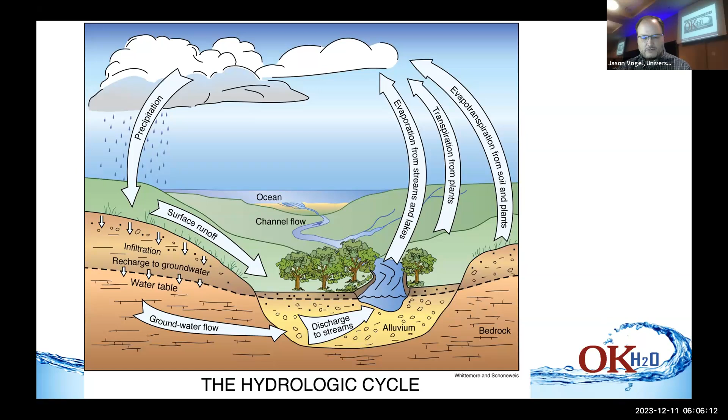And you can even see that, downstream, it appears that the stream is somewhat incised. So there's a lot of things on this particular hydrologic cycle image that really play into this nexus of stormwater and floodplain management and in-stream management.

I think most on here have probably seen this image, discussions of land use impacts on the water cycle, depending on the percent impervious surface. These are some EPA images. In this particular instance, you can get 5 or 6 times more runoff when you get lots more impervious surface. That isn't news to a lot of folks here.

Specifically, I was talking in Oklahoma, and we have a book called the Water Atlas of Oklahoma that talks about averages for each part of the water cycle. A lot of people think about Oklahoma as just straight prairie, but Oklahoma is really diverse. It has 13 different ecoregions, going from the Panhandle, where there's 15 inches of rain, to southeast Oklahoma, where there's 65 inches of rain average per year. There's actually native alligators in southeast Oklahoma, and that's all in the foothills of the Ozarks.

The natural system down in southeast Oklahoma may be 1/3 runoff, lots of rock, foothills of the Ozarks, lots of rainfall. Central Oklahoma, where Oklahoma County and Oklahoma City are, is about 15% runoff, a lot of evapotranspiration. And then you get out to the Panhandle, not as much rainfall, and it's relatively sandy. It'll go into the shallow subsurface, but then 97% of that water actually evapotranspires, and there's only 2% runoff.

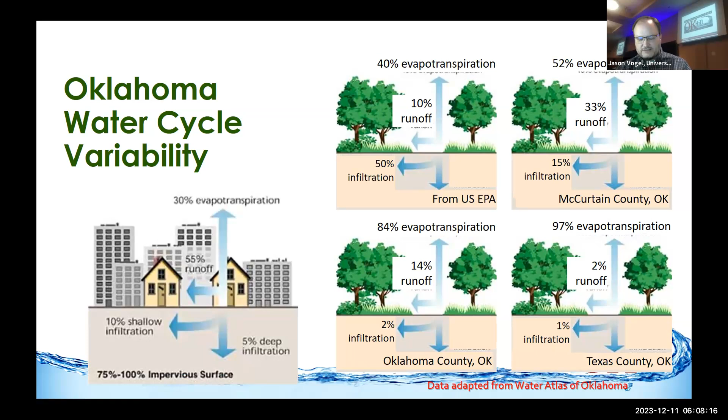So impervious surfaces in an area where there's naturally only a 2% runoff, and you change it up to 60% runoff, man, that's going to make a huge impact on our water quality, on our streams, compared to what is there. So I wanted to start having that conversation and have them think about, from east to west, the different things that we're dealing with, and how that's so important.

As I mentioned, this was floodplain managers. Some of them wear more than one hat and they know what stormwater management is. Some of them are emergency managers or in other areas. So for background, I started talking about traditional stormwater management with pipes, channels, ponds, things that move the water off as quickly as possible.

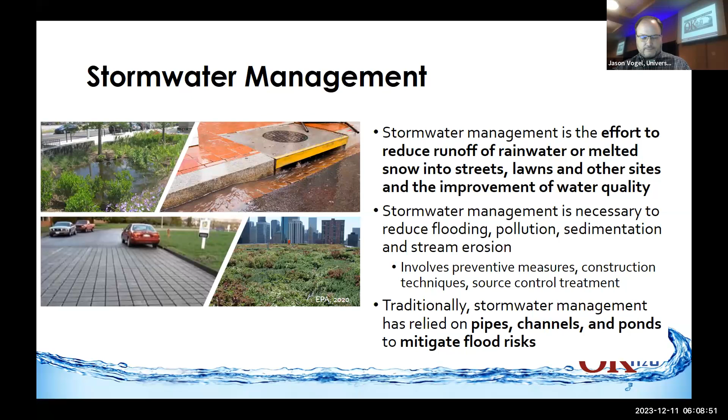In this group, we know that that's causing degradation of the stream and the floodplain downstream potentially, and to the habitat. And I talked to them about how a detention pond works, where we're trying to get the pre-development peak flow rate equal to the post-development peak flow rate.

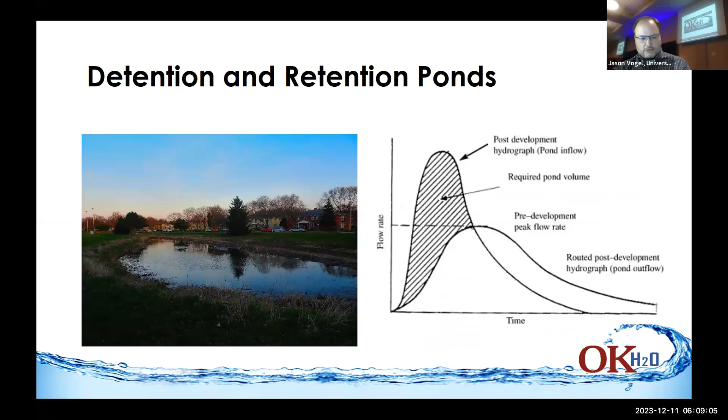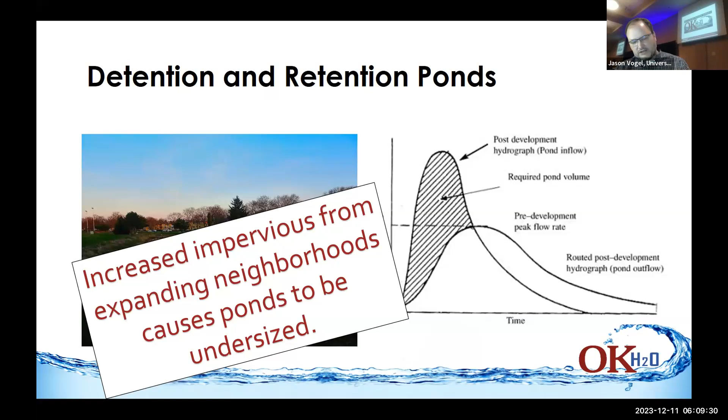And a lot of places in Oklahoma, the ponds may be sized for a particular development, but then another development comes in 5 years later upstream, and that pond is now undersized for that entire area, especially in some of the smaller communities where there's less thought about connection and integration of the management. And there's also a water quality component to detention ponds.

The folks in this room are thinking about detention ponds solely from a floodplain management and a flood management standpoint. So just kind of bringing some of those numbers in there from our nutrients, sediment, heavy metals, some of the things that are causing a lot of impaired streams in Oklahoma.

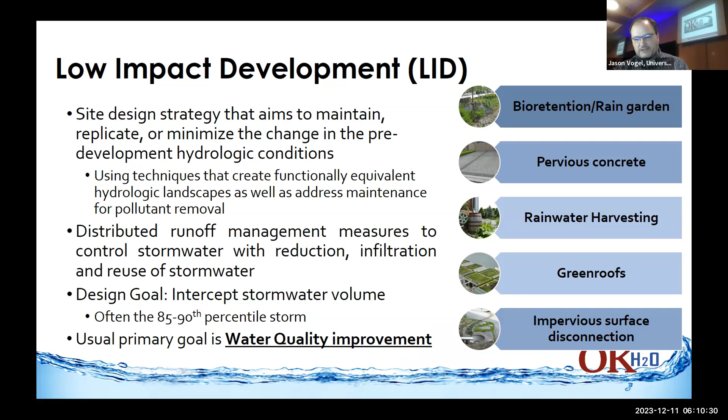Next, we move into low impact development, sometimes called green stormwater infrastructure, or a lot of different types of things, with the primary goal of water quality improvement. Usually when you design these, you're trying to intercept something that's often called the stormwater volume, at least in Oklahoma and a lot of the areas around here. That's often between the 85th and 90th percentile storm, intercepting the first inch. That's not going to do a lot for your flood.

And I just went through a little exercise utilizing the rational method. If you put some kind of LID structure like bioretention in the corner of an impervious area, depending on how big that bioretention cell is, if it's 5% of the area, it's that orange area. If it's 10%, it's the yellow, and hopefully y'all can see those colors. If it's 15%, it's the purple. But depending on what the infiltration rate of the soil is, you're really only reducing the peak by less than 10% with traditional bioretention design.

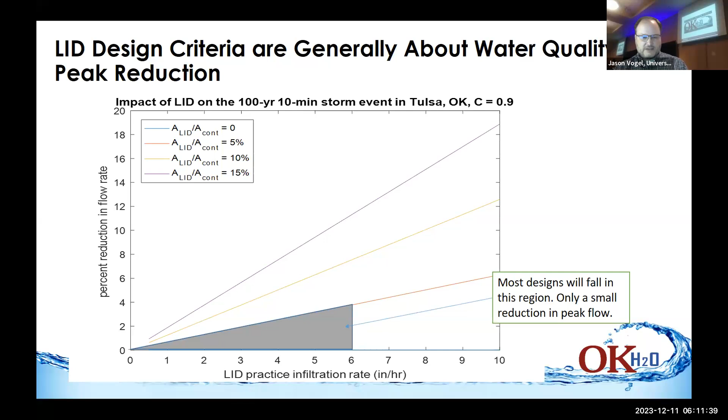And that's a question that I get a lot from folks that are in the flood area and really in Oklahoma, because flooding is a much more in the news and on the mind issue than water quality. And so when you're talking to them about spending money on stormwater management, such as green infrastructure, they ask about the flood reduction. And, as traditionally designed, you can't do that.

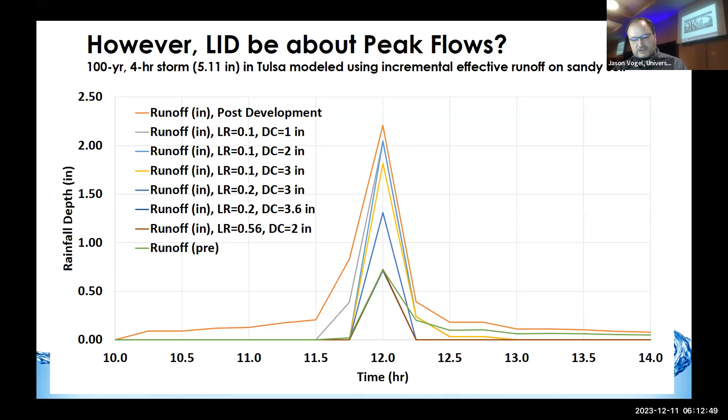Those last two with a loading ratio of 20%, and designing for 3.6 inches, or a loading ratio of 0.56, which isn't necessarily realistic because it's greater than half of the area. You can do it with 2 inches, but there we're able to reduce the flow. And we actually have an over $4 million installation that I helped design going in Oklahoma City that is doing just that.

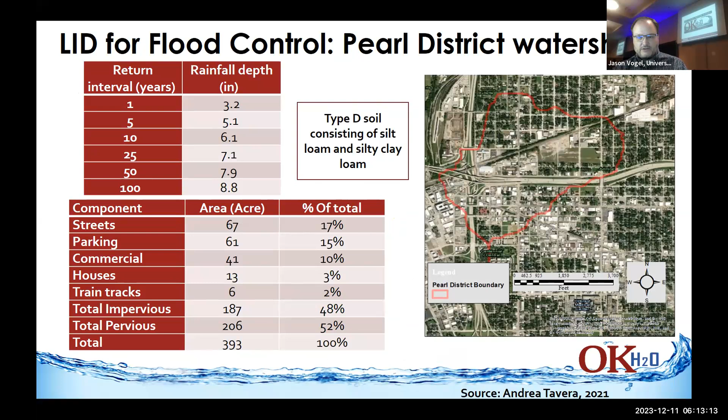No, I won't talk about that specific one, but here's a similar exercise that we did in Tulsa in the Pearl District. One of my former master students, Andrea Tavera, did this looking at the Pearl District. It's an area in Tulsa that floods a lot. It's just to the east of downtown, older part of the city, where we used a model called InfoDrainage.

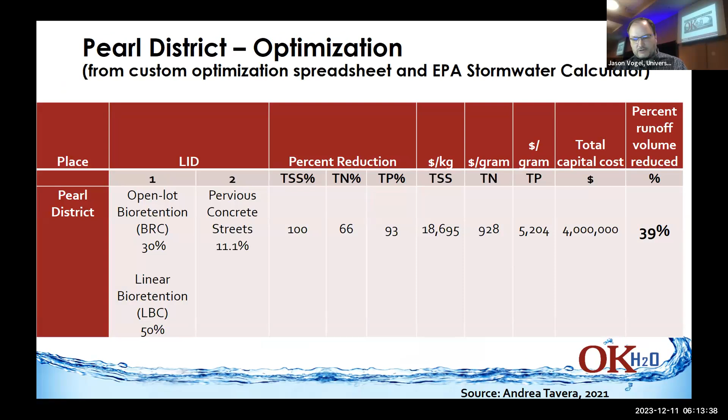We modeled the troubled areas, did some optimization, trying to design for water quality, but also that hits on water quantity. So we're reducing the flow with bioretention and pervious concrete in that area, looking at 3 different areas. And with green infrastructure, we can reduce that flood flow around 75% at the 3 areas, and reduce that 100-year storm to less than the 1-year storm

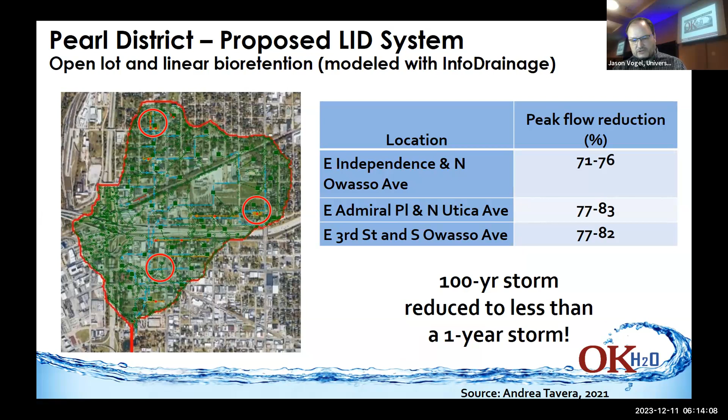for those drainage areas. And that's something that's pretty attractive in these areas where it's all built out, older neighborhoods, and buying out areas to build detention ponds is not necessarily politically popular. And so if they can do some other things, that's really great. At the same time, we're really helping the water quality with sediment, nitrogen, and phosphorus reduction in those areas.

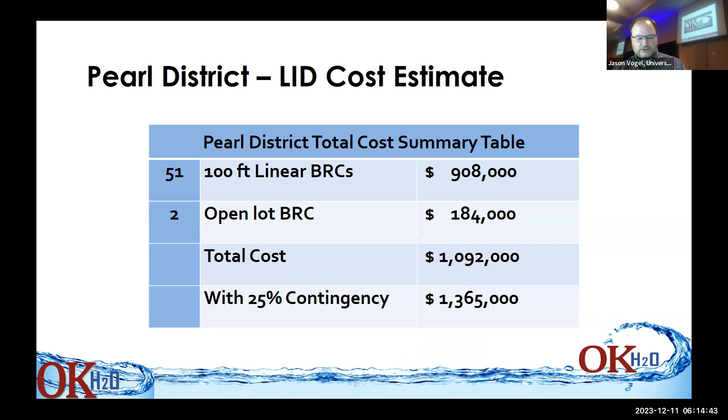And here's the cost estimates for what we had proposed, about 1.4 million. The cost of buying out lots and building ponds is greater than this. This obviously is just the capital cost, not the maintenance cost, but still it's a pretty cost-effective solution, and something that even in Tulsa we're continuing to have conversations with them about.

So that's the upstream part of the drainage. And then moving into the floodplain, once again, the audience that I was talking to for this presentation was floodplain managers.

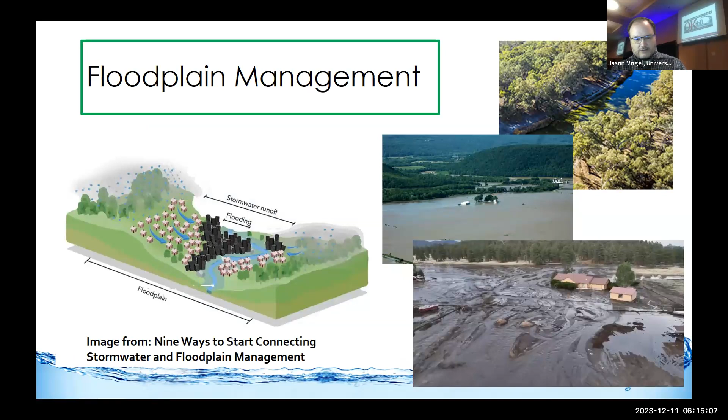There's this really nice document out there, if y'all haven't seen it before, 9 Ways to Start Connecting Stormwater and Floodplain Management, that has some pretty similar type of topics. But at the National Stream Restoration Conference, David connected me with Will Wilhelm, and I borrowed a couple of his slides because I thought it was so pertinent. I don't know if anybody got a chance to see his presentation,

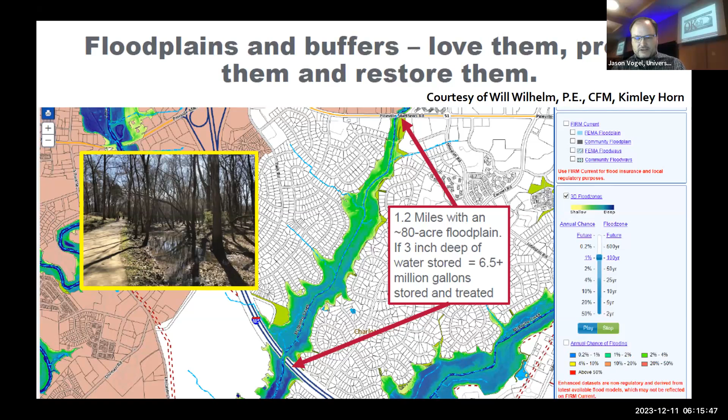but he was talking about an area that he was looking at, 1.2 miles of stream with an 80-acre floodplain. And if the floodplain, and this is just an assumption, I talked to him about it afterwards a little bit, if the floodplain stored 3 inches of water, that's 6.5 million gallons stored and treated. And if you're trying to compare that to bioretention basins designed with traditional design criteria, that's 500 to 700 bioretention cells that connected floodplain is performing the same function. And so you can—

It is not. Pardon? Question? Oh, did somebody say something? Okay. I think we just had somebody off mute, so just continue.

Okay. Cool. So that is something that's not been specifically studied. It was just some thought process from Will, and I thought it was really interesting. As a researcher, it's something that's stuck in my head, and something that I'd love to explore a little bit to see how that comparison plays out.

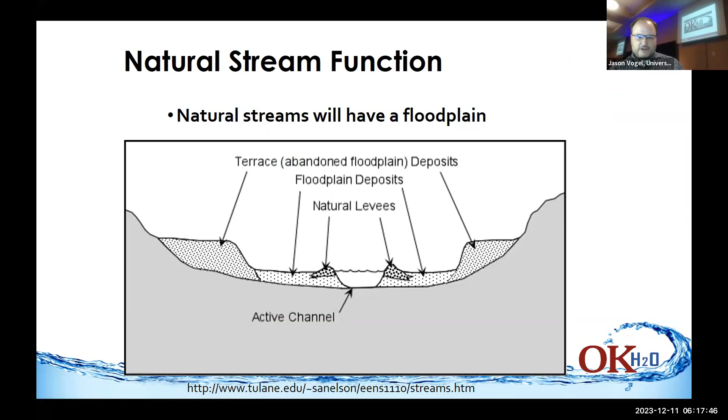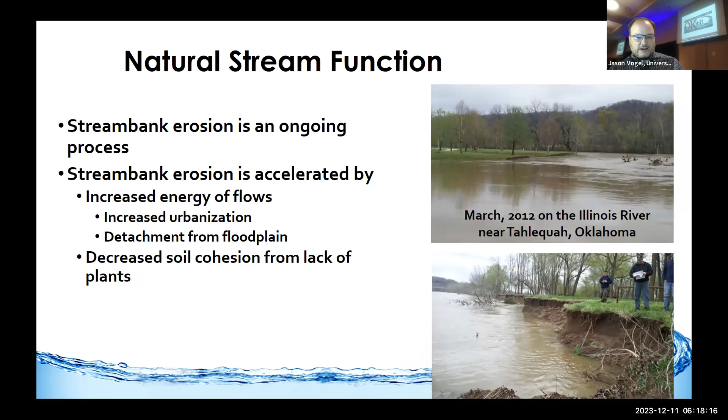And then finally, I moved into the channel, just talking about floodplains and natural streams on a high level, talking about what streams do at all scales with meandering, and your riffle pool sequences, and how it's trying to decrease energy, with some examples on the Illinois River in eastern Oklahoma that David and a group helped us with, a number of stream bank stabilization restoration areas. But just talking about stream banks, and how, once again, that interacts with water quality.

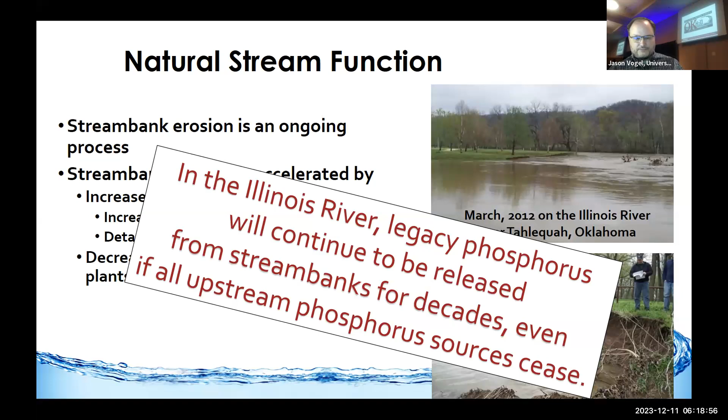There's decades of both treated wastewater and chicken litter from Arkansas and eastern Oklahoma that have come into the Illinois River. It's stored in the sediment in those stream banks, and so the more stream bank erosion you have, the more release you have of legacy phosphorus. There was one study that showed that even if all upstream phosphorus sources ceased, just from that sediment you'd have phosphorus released for decades because of all the phosphorus that's now stored within those stream banks. So stabilizing that sequesters what's in there.

Talked about Lane's balance and how that impacts habitat. And finally, moving into the hyporheic zone. So once again, this interaction between stormwater management, floodplain management, in-stream management, and the hyporheic zone for the floodplain managers was definitely new. This is a really in-depth image, so we didn't go really into depth, but just emphasizing the importance of the hyporheic zone in the entire biological system that is in the stream, and the water quality processing that happens within the stream.

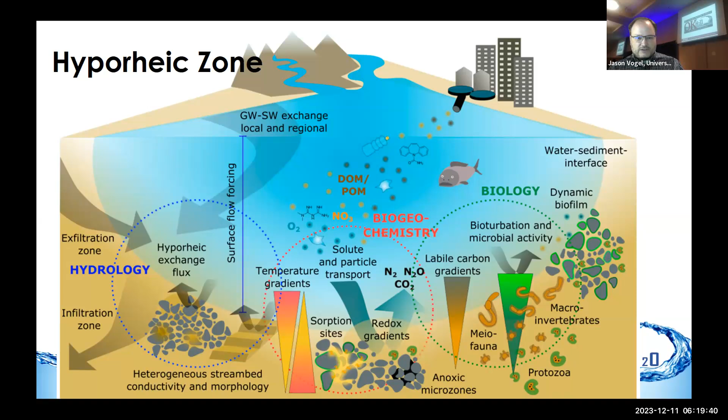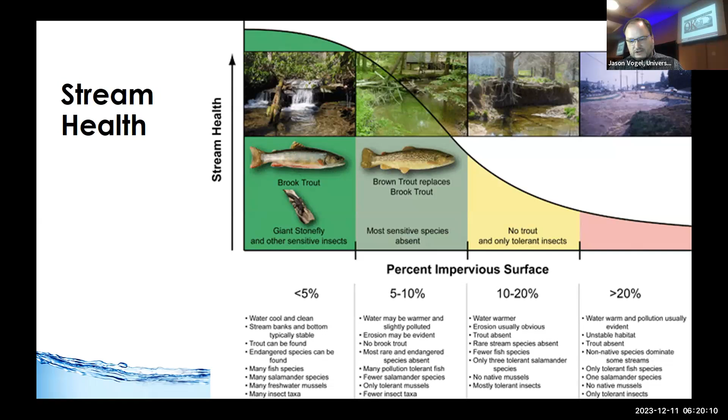And then we brought it all together with this slide that I see utilized a lot of places, from the study up in the Pacific Northwest that looked at the occurrence of trout and sensitive insects related to impervious surfaces. One of our stormwater managers in Tulsa has actually done this to some extent in the Tulsa area with some local fish. And it's something that I'd like to follow up on some more.

And then something that everybody everywhere I think knows about is TMDLs, total maximum daily load models that partition off pollutants to different sources, and give a goal for the stormwater managers and the natural resource managers in the area to try to hit to get, in this case, Lake Thunderbird in central Oklahoma off the 303(d) list for phosphorus, but whatever the pollutant may be.

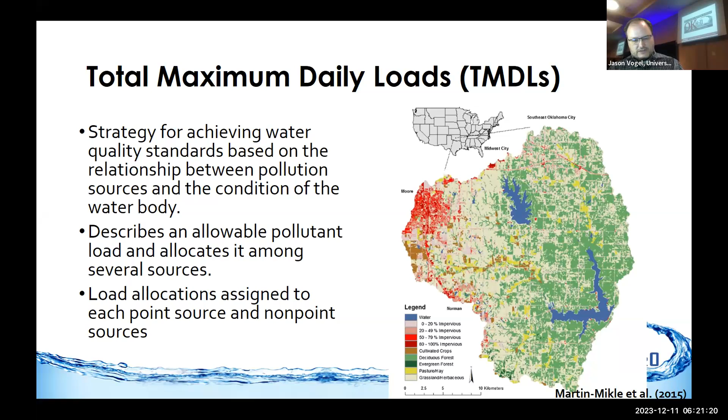And this is one of the things that once again brings together the importance of in-stream management, whether it be sediment or phosphorus, with the landscape management and the floodplain management. And some of the solutions may be in stream or within the floodplain. Lots of this going on in different places in the U.S., but I don't know if it's discussed or intentionally thought about as much in Oklahoma. We did some exercises in the Lake Thunderbird watershed, kind of partitioned off like this, to identify where some of the different best management practices would be best utilized, whether it be on the landscape or within the stream or the floodplain.

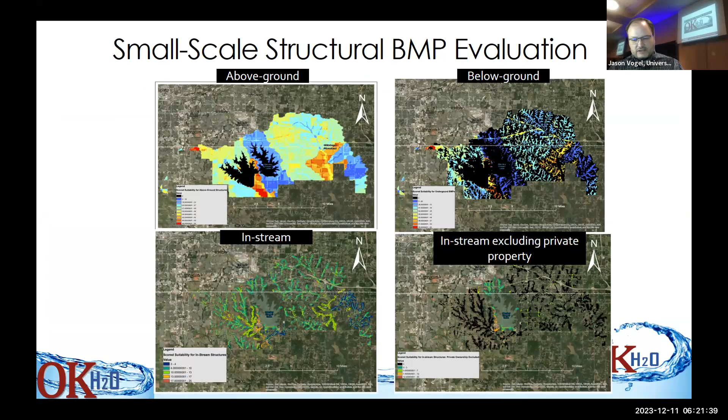Just did some optimization. I'm going to kind of skip through this for the sake of time, but just found some locations where we could put that and get the best bang for our buck and help out our water resources along the way.

The next thing I talked about a little bit was climate change as an exacerbator, and this kind of goes across all parts of the hydrologic cycle, and talked about this project that we're doing in the southern part of Oklahoma, the Red River Basin, basically the southern third of Oklahoma, looking at impacts of climate change and potential water reuse scenarios.

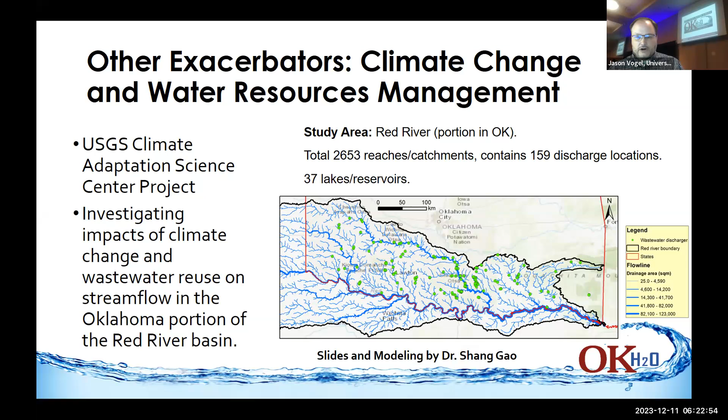That's a climate adaptation strategy that's gaining steam in Oklahoma, but we wanted to look at unintended consequences of that, of changes in floods or in low flows, in particular low flows for us, because it would impact stream flow. There's some streams in Oklahoma that if it wasn't for wastewater effluent, there'd be times of the year where it's not flowing at all, where now they are, and so that would kind of change our entire ecosystem and the flow regimes that are going on.

And so the flood flows were similar, but when we went to the low flows, flows that are below the historical 30th percentile, which is a simple method that's in the literature and something that we just used as a start for where the environmental flow would be. Historically, by definition, it's 117 days of the 30th percentile.

But when you add in climate change, looking at that zero wastewater reuse, so we're not taking any wastewater out of the stream, we go from 117 days to 173 days below the historical 30th percentile, or that environmental flow, and beyond the impact to the fish, that's going to impact the plant community. It's going to impact the stream and the geomorphology of the stream when you do that,

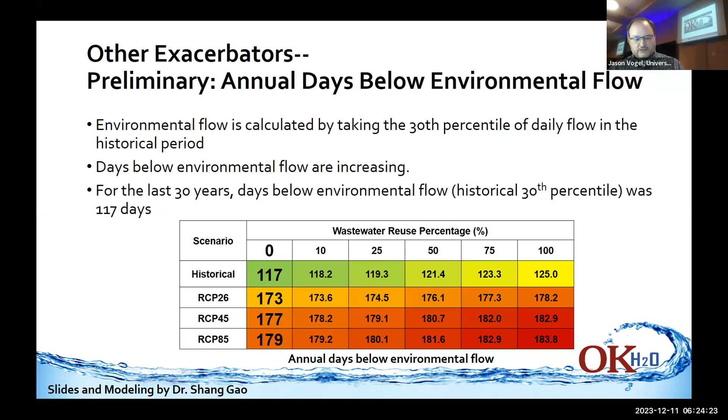because you may have alluvial ephemeral islands and sandbars where now with less water, you're going to get plants established on those and they become permanent islands. Maybe you start to get braided. There's a lot of different things that could happen to the geomorphology related to that. And so just thinking beyond even just the runoff aspect of it, but the in-stream aspect of what's happening.

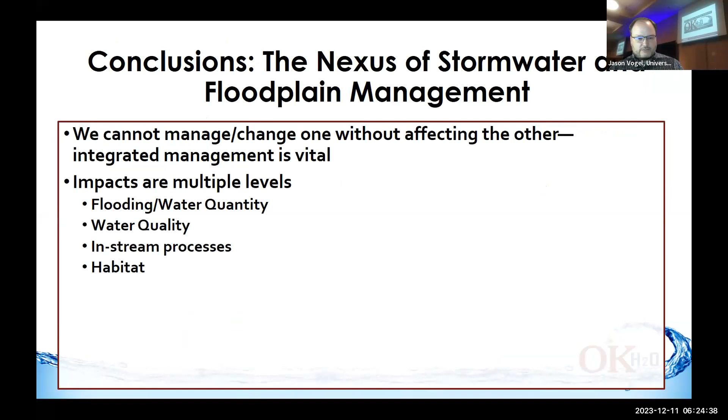So kind of my conclusion for the floodplain managers when I was talking about that is, you can't change one part of the hydrologic cycle and management without changing the other. So integrated management is vital for flooding, water quality, in-stream processes, and habitat. TMDLs, we're getting more and more in Oklahoma. So this integrated management is going to be vital for trying to achieve those goals and do what's mandated for our communities. And finally, climate change and water resources management are going to be additional exacerbations to this challenge.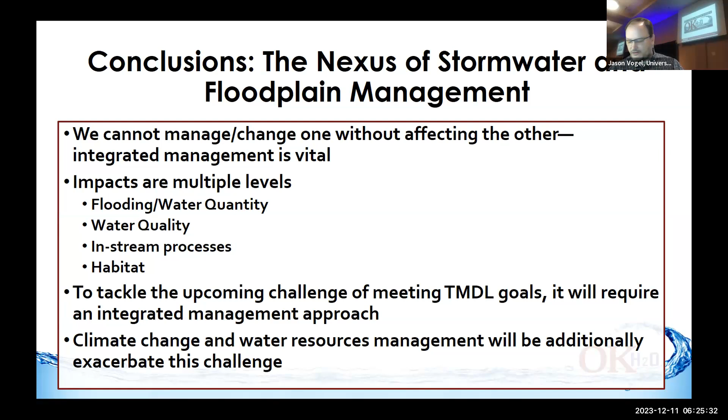It's not in here, but in Oklahoma, we have lots and lots of reservoirs. WPA was very active in Oklahoma in the 40s. And so I heard a stat one time that we have more shoreline in Oklahoma than any state that's not on the ocean. It's because of all of the reservoirs that we have that were primarily for flood control. So management of those along with climate change are going to be really, really important.

And so hopefully that's about the right length, I think. And the intent of this is partially for the content, but a lot of it, especially for this group, is just the discussion that's happening out here in Oklahoma, and I'm sure other places, about integrated management and intentionally addressing this from our associations that we have, such as Floodplain Managers, our Stormwater associations, other types of groups.